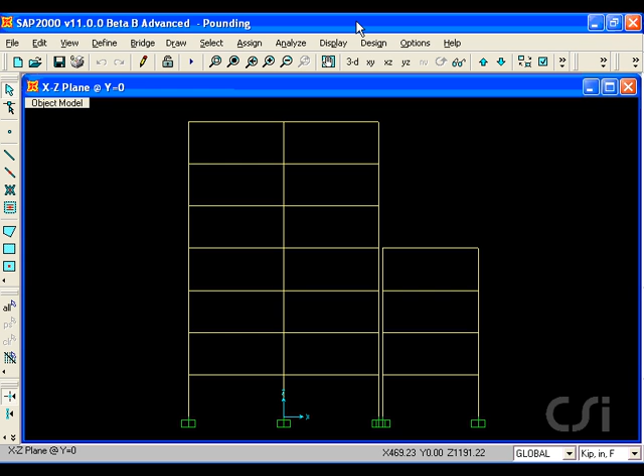This tutorial will show two different ways to utilize the nonlinear gap element in SAP 2000. First, we will show how to perform a building pounding study. Here we have a 7-story building adjacent to a 4-story building. Although the column lines are separated by a 16-inch space, we are going to assume that the physical gap between the buildings is only 1/4 inch.

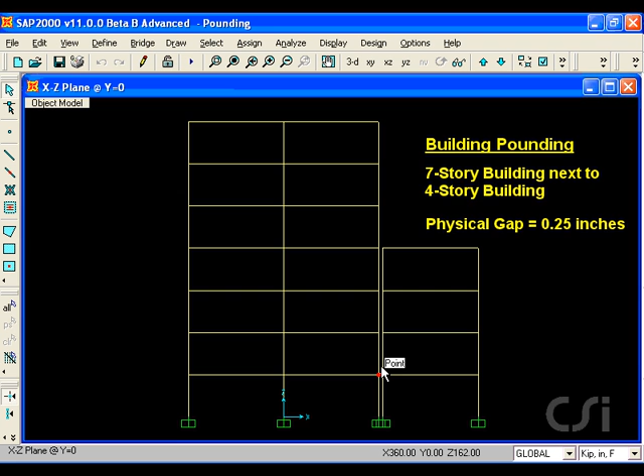We will subject the buildings to an earthquake ground motion and use the nonlinear link elements to model the gap. We start by defining the gap element, which is done under the Define Link Support Properties command. Here, we will add a new property of type gap, which we will call gap.

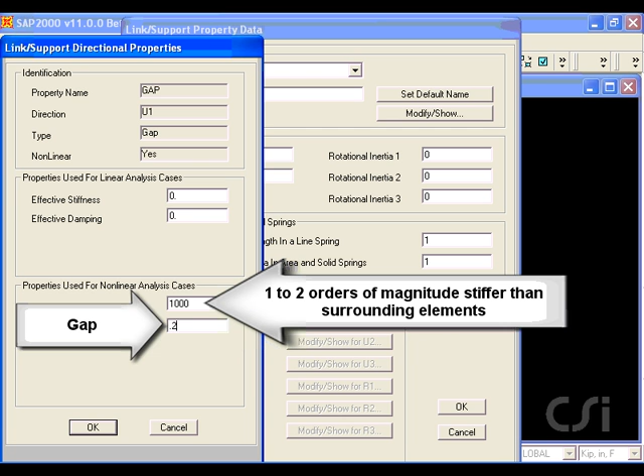It will have properties in only the local U1 direction, which is along its axis. It will be a nonlinear element, and if we click on the Modify button, we can specify its nonlinear stiffness and the starting gap or opening of 0.25 inches. We want the gap element to be stiffer than surrounding objects, but not too stiff.

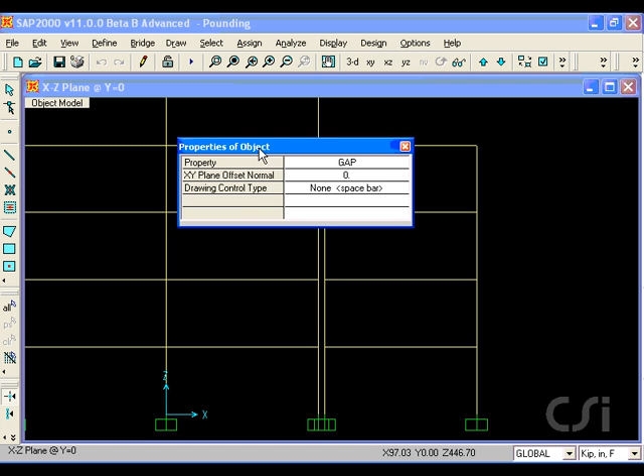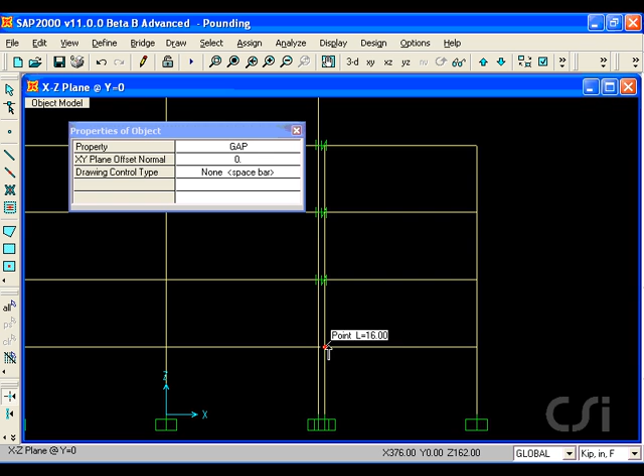Next, we will window in between the two buildings so that it will be easier to draw the gap elements. Go to the Draw Two Joint Link command and make sure that the property of gap is selected. Draw the gap elements across the opening between the buildings at each floor level. Click on the Select button to leave the drawing mode.

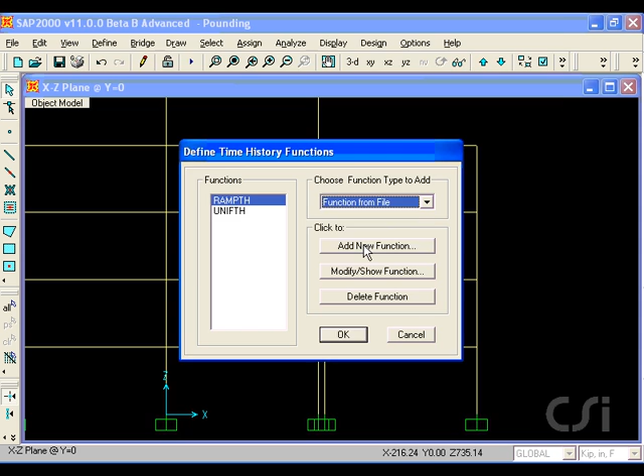Next, we will define the time history input. We will use a function from a file, in this case an El Centro earthquake. This particular file is in a time and function value form, with 3 data pairs per line.

Now we will define our analysis cases. In addition to the default dead load case, we will add a modal case with Ritz vectors. We will ask for a total of 30 modes. We need at least 15 for the 7-story building, the 4-story building, and the 4 links, but we'll ask for 30 to be safe.

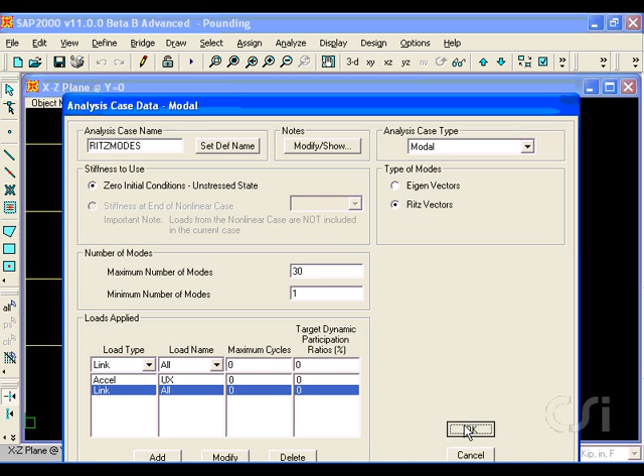For Ritz modes, we need to define the starting load vectors. In this case, we will use acceleration in the x direction and the built-in deformation load for the links. We also need to add an analysis case for the nonlinear time history, which we will call pounding. It will be nonlinear using Ritz modes.

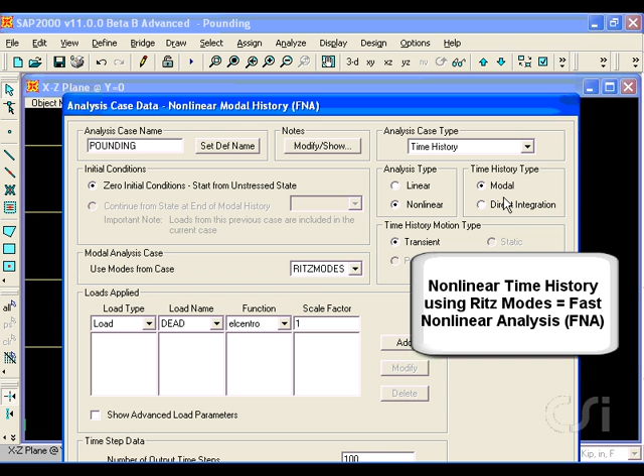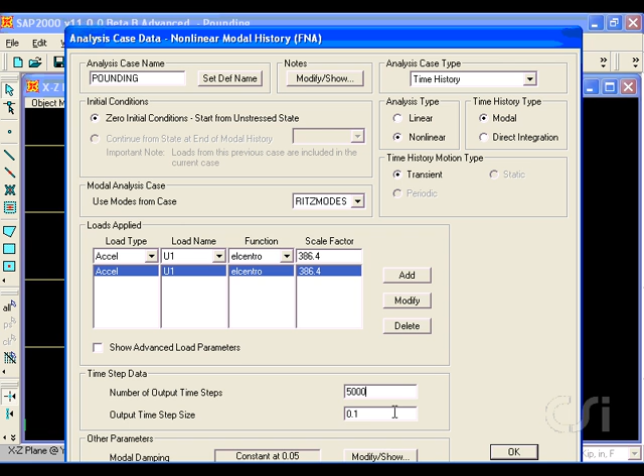The loading will be the El Centro acceleration record, scaled from G units to inch units. We will use 5,000 time steps at a step of 0.002 seconds for a total of 10 seconds. And we will leave the modal damping constant at 0.05.

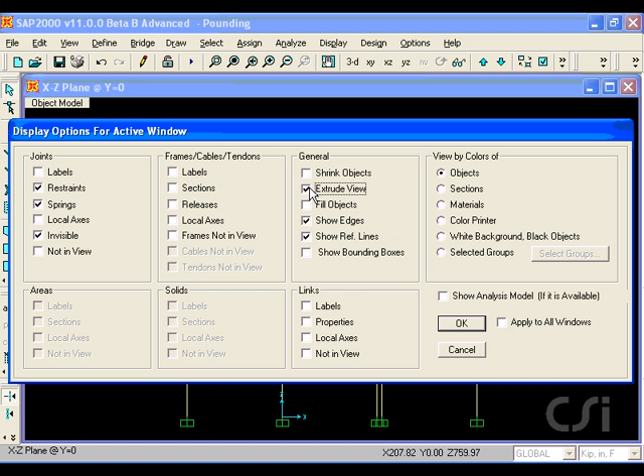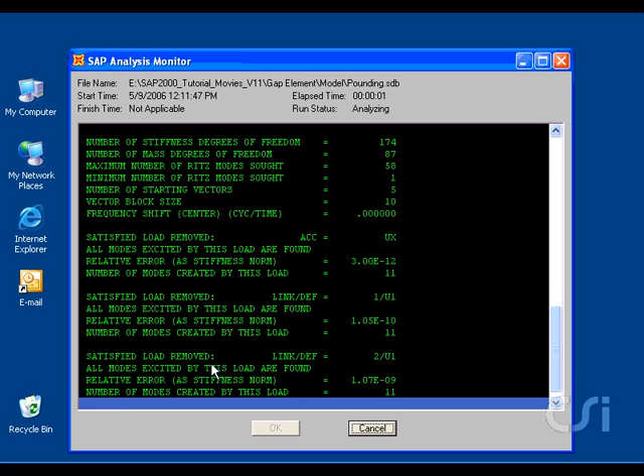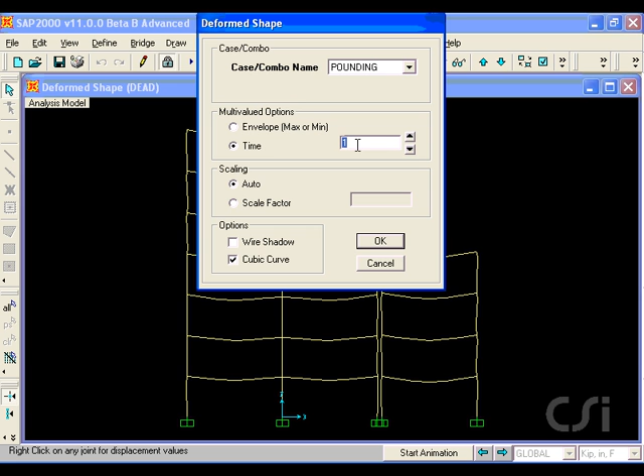Before we run the analysis, we will change the display so that we may see the model behavior slightly better. We will turn on the extrude view option and remove the links from the display. We will now start the analysis. First, we will display the deformed shape for the pounding analysis case at a time of 5 seconds. We can clearly see how the buildings have separated.

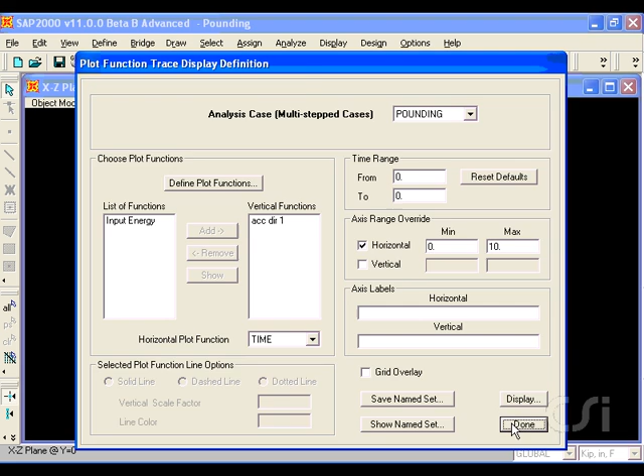Next, we are going to create a plot of the input ground acceleration. We will save this plot as a named set, ground. The best way to see the pounding behavior is to create a video of the time history response.

We will create the video using the pounding analysis case for a time span of 10 seconds. We will also ask that the previously defined ground motion graph, ground, be displayed. We will set the magnification factor to 50 so that the deformations appear larger and easier to see. Let's see that one more time.

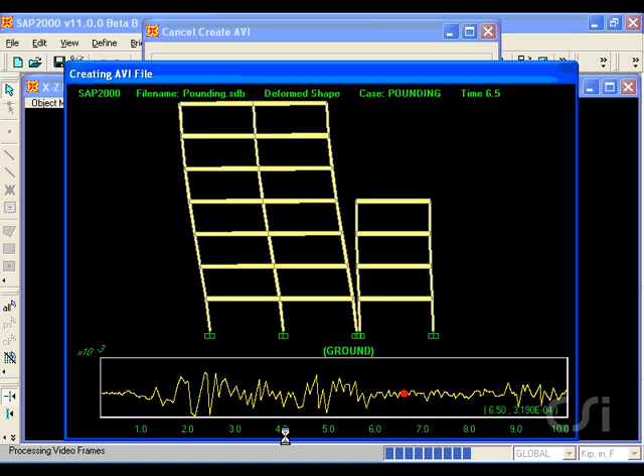This concludes this first example.

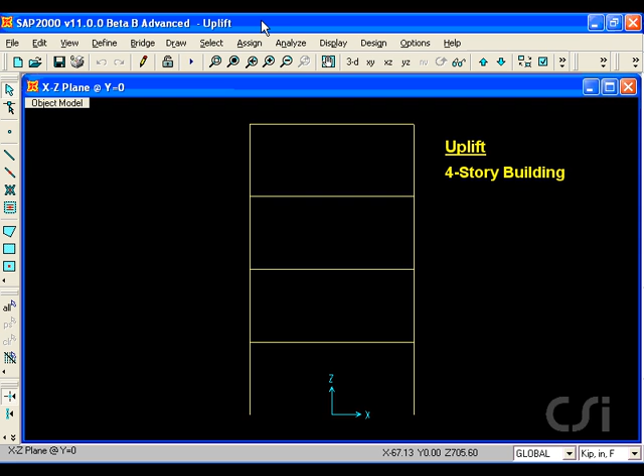For the next example, we will illustrate how to use the nonlinear gap elements to model uplift in columns. We will use the same 4-story, 1-bay building from the first example, subjected to the same earthquake ground motion. We will use the nonlinear link elements to model uplift in the vertical direction.

However, rather than using Ritz modes with the fast nonlinear analysis time history option, we will use a static nonlinear analysis to apply the gravity loads followed by a direct integration nonlinear time history analysis for the earthquake.

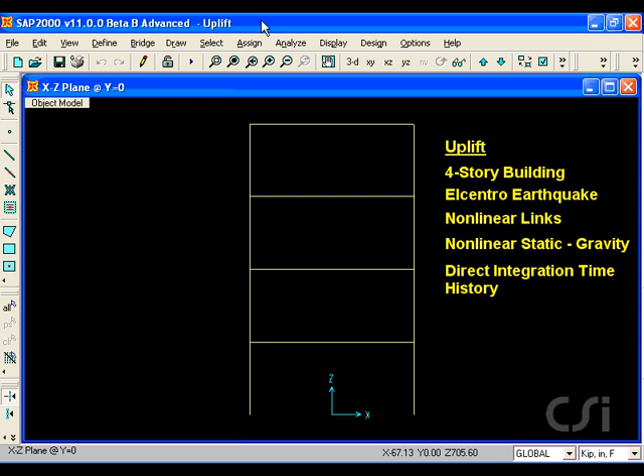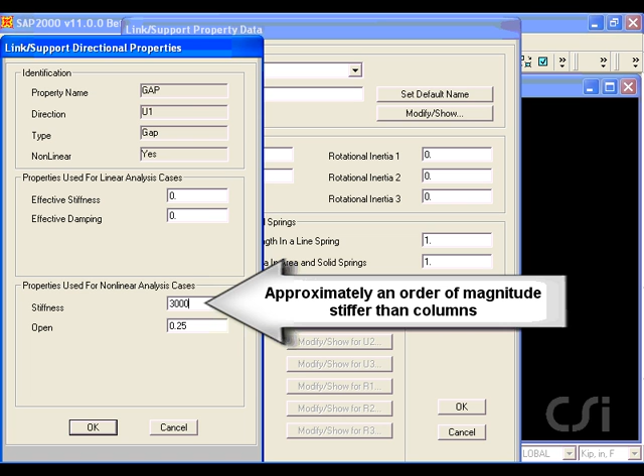Again, we start by defining the nonlinear link elements. We will modify the previously defined gap element. We will modify the U1 nonlinear properties by changing the stiffness. We'll use 30,000 due to the larger axial stiffness of the columns, and we will switch the open variable to 0, as the gap should start in the closed position.

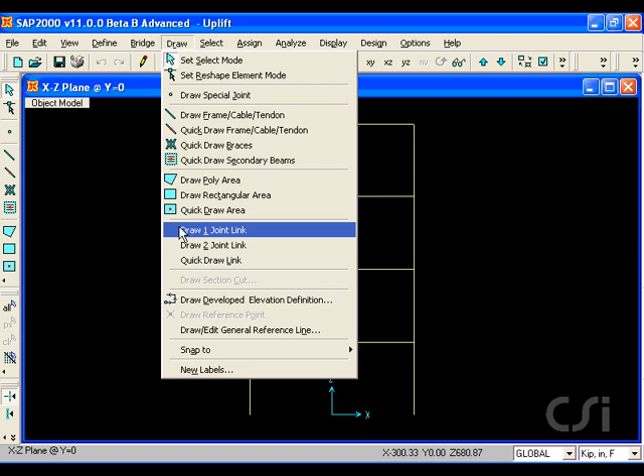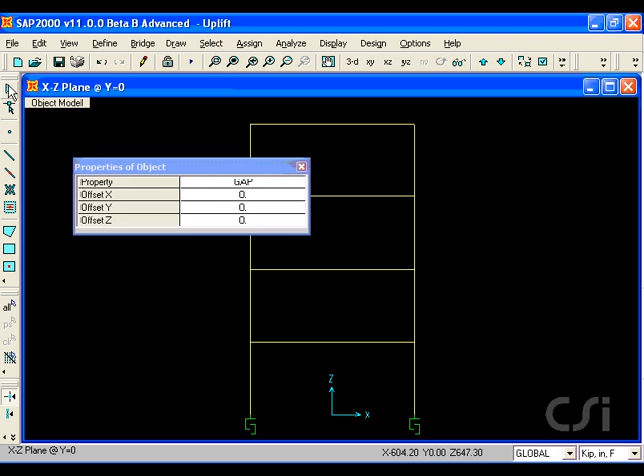Next, we will draw the links using a one-joint link. Make sure that the gap property is selected. When drawing a one-joint link, the U1 direction is assumed to be vertical. Next, we will verify that our ground motion is still the Elcentro acceleration defined in the first example.

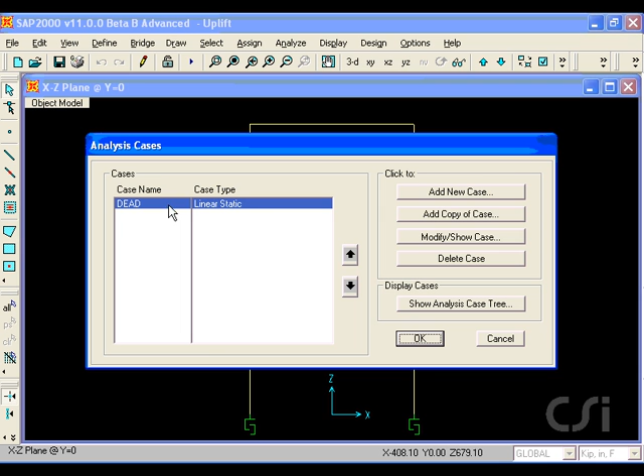Next, we will set up two new analysis cases. The first will be a gravity case, where the dead loads will be applied in a static nonlinear fashion. This is done so that we can apply the dead loads sequentially prior to the uplift analysis.

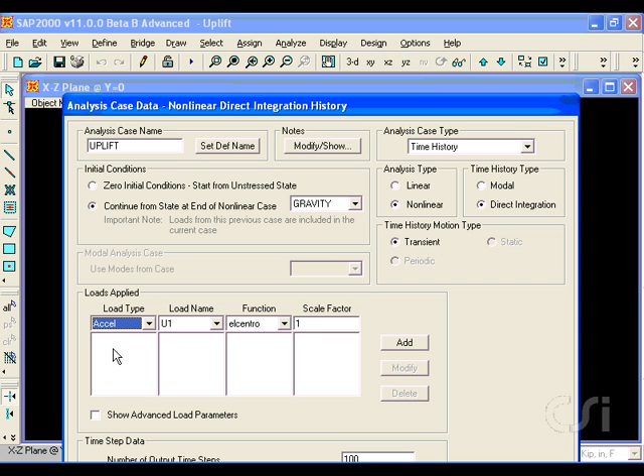The second case we define will be for the time history analysis, which we call uplift. This is a nonlinear case using direct integration. It will start with the initial conditions determined from the gravity case. It will again use the Elcentro acceleration record scaled from G to inch units.

We will use 5,000 steps at a 0.002 time step for a total of 10 seconds. The proportional damping will be specified by period. We previously calculated the first period to be 0.98 seconds and the second period to be 0.28 seconds. We will use 5% damping in both modes. Note that the program automatically calculates the mass and stiffness proportional damping coefficients.

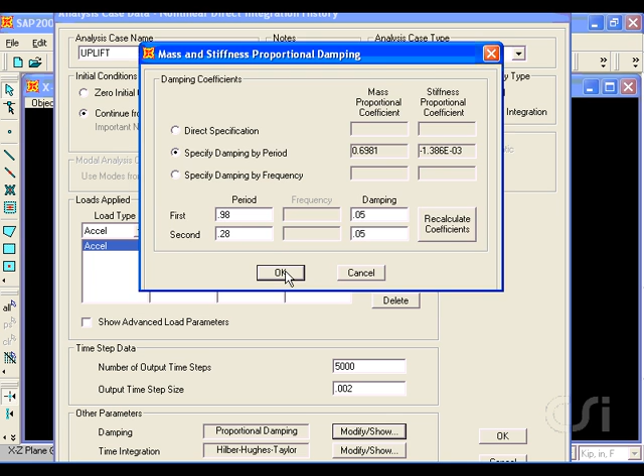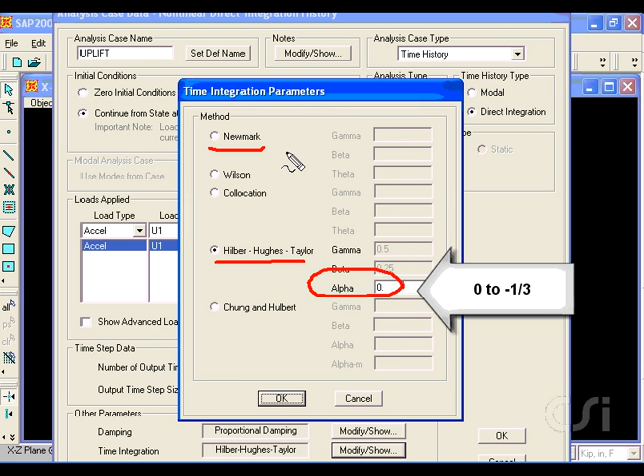For the time integration technique, we will use the default Hilber-Hughes-Taylor method, which is typically the preferred method. Note that when the alpha parameter is set to 0, this method defaults to be the same as the Newmark method. Alpha can range from 0 to -1/3, and we will leave it as 0.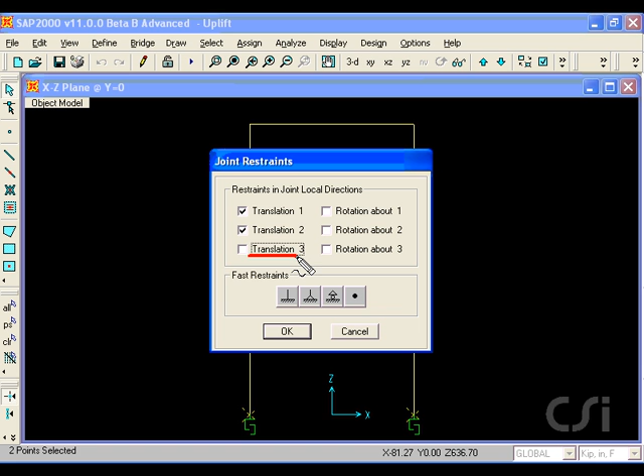The last thing we need to do before running the analysis is to restrain the base of the columns in the X and Y directions. Remember that translation 3 is in the vertical direction, which is where we have placed the gap elements. Now we are ready to run the analysis. We will shut off the dead case, as that has been replaced by the gravity case in our analysis. Note that the direct integration analysis takes significantly longer than the fast nonlinear analysis in the first example.

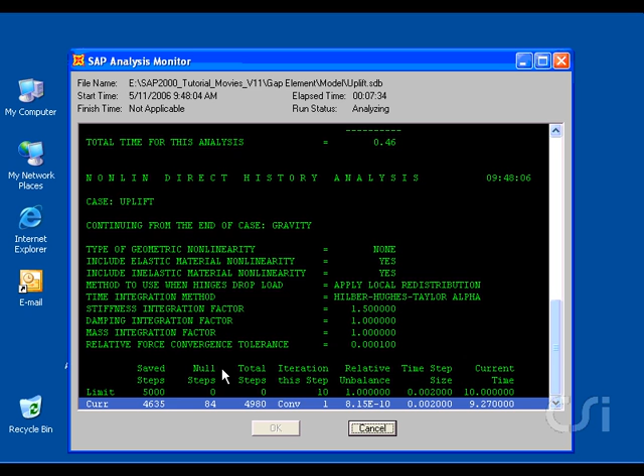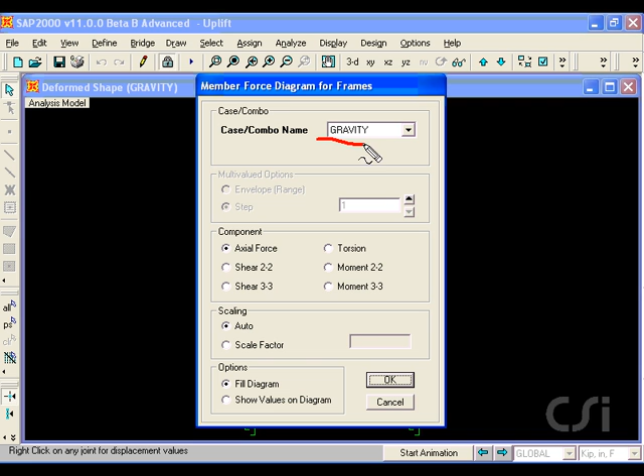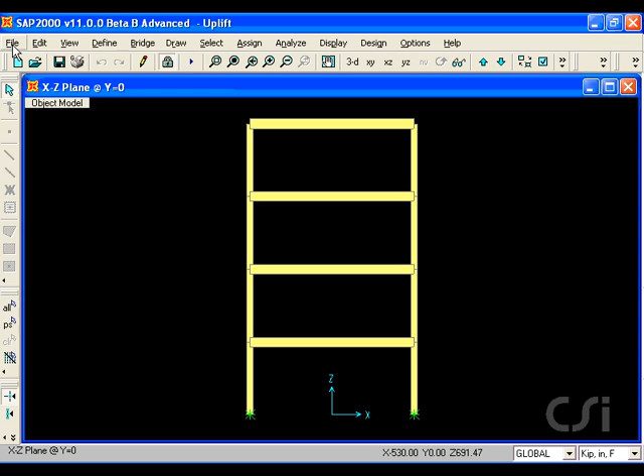Upon completion of the analysis, the gravity deformed shape is displayed. We will also display the axial forces for this case to make sure that the distribution looks appropriate, which it does. As done in the first example, we will now display an extruded view without the links. As previously stated, creating a movie of the time history response is a quick way to review your model's behavior, a valuable first step to ensure that the response appears appropriate.

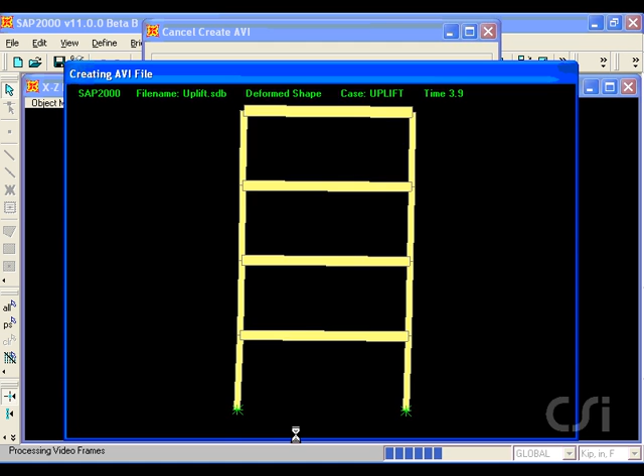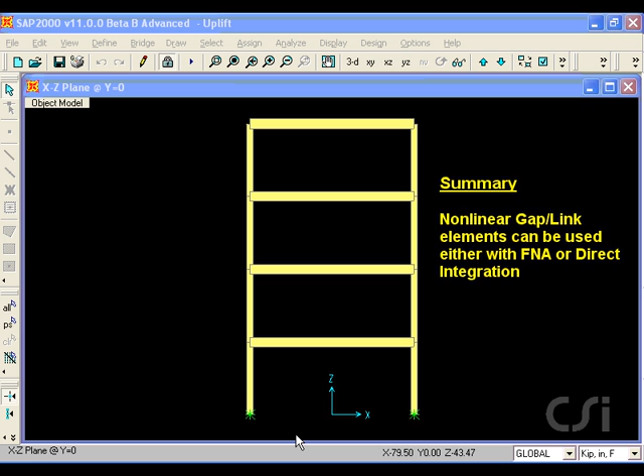In summary, nonlinear gap link elements may be used in either a fast nonlinear analysis or in a direct integration time history, and should typically have a nonlinear stiffness assigned to them, an order of magnitude or two stiffer than the surrounding elements. This concludes this tutorial.